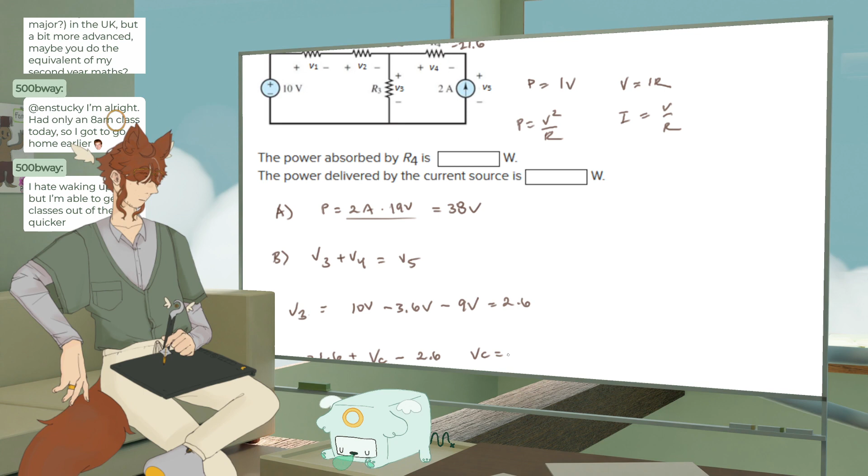Don't worry about it. Current, or we'll say like VC, and then minus, that would be a minus. It's fine. Minus, what do we say? Almost 2.6, so VC equals 21.6 minus.

I mean, for R3, the current's gonna split, so the current won't be 2. That feels kind of weird. I guess I could check the outer loop, so it would be 10.

Let's try that. So if we're going from negative to positive, oh god, let me turn my mouse. If we're going up, okay, let me put it more on center screen for you guys. That was my negative direction. So we'll say negative 10 plus 3.6 plus 2.6. I have another plus 21.6, and then in this case it would be positive negative, right?

So that's definitely not 0. Definitely not 0 is the thing.

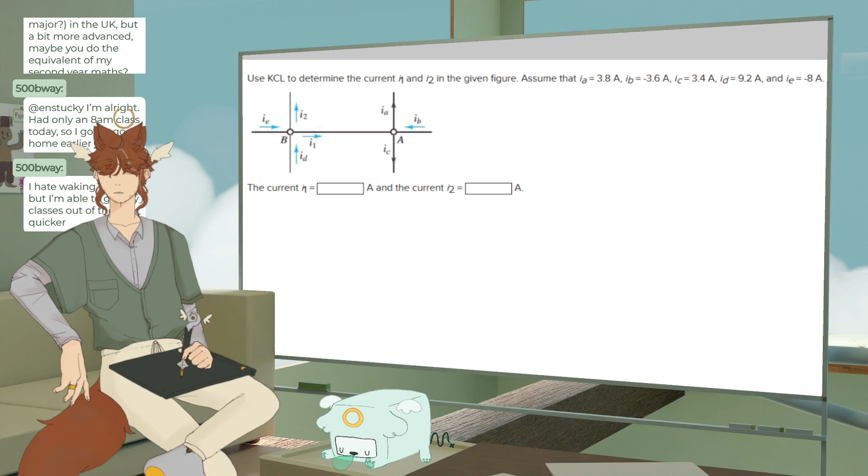Use KCL to determine... okay, sure. Use Kirchhoff. Kirchhoff? I've heard some people say Kirchhoff and some people say Kirchhoff. I don't know which one it is. I should probably look it up. That'd be, I feel like that's pretty important to just know the name of the guy who did everything. Let's see, is it Kerr? Let me get a pronunciation on that. Let's see. Okay, I cannot pronounce it.

I cannot pronounce this. I don't know how to pronounce that one. That one's, I think it's Kirchhoff. I think it's also Kirchhoff, but my current professor keeps calling him Kirchhoff, and I'm like... But then again, people mispronounce phi every single lecture. See, I literally called it phi. It's pronounced phi. This thing. Phi. Rhymes with pi. Oops, that's not it. Okay.

Determine I1 and I2. Alright. Okay, so we just add them all up. So for A, I don't know, let's do A first.

I've never heard it called fee. Because people read it like this, and for some reason they think that equals fee, like fee, fi, fo, fum. But it's like pi, it rhymes with phi. I don't know, people definitely have gotten that one wrong, at least in my classes. Which, you know, maybe not a good sign, but

what can you do? Okay, so IB equals IA plus IC. And then we have another one, plus IB plus, woof, IB plus I1 equals IA plus IC, and then over here, for A, and then for B, we've got, going into it, IE plus ID equals I1 plus I2.

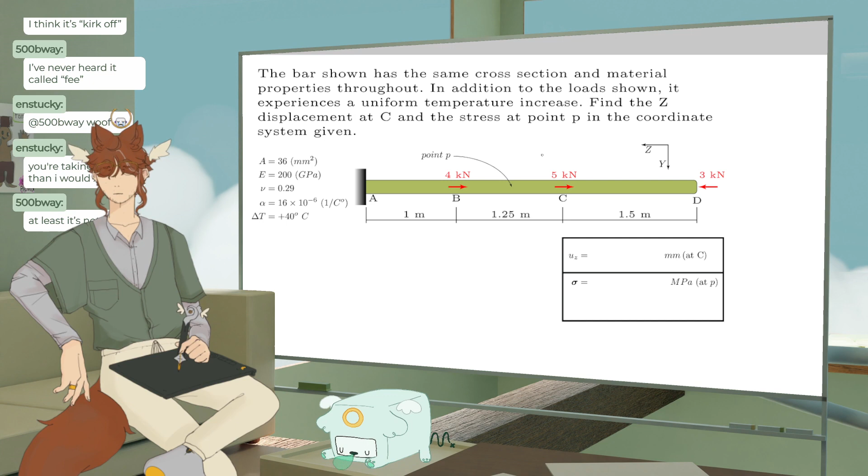And we're trying to figure out how much it deforms, like stretching or compressing. So in this one, the same cross-section and material properties. Our basic equation is we have a delta. The delta is proportional to the load: as the load we put on it goes up, more deformation. As the bar gets longer, it deforms more.

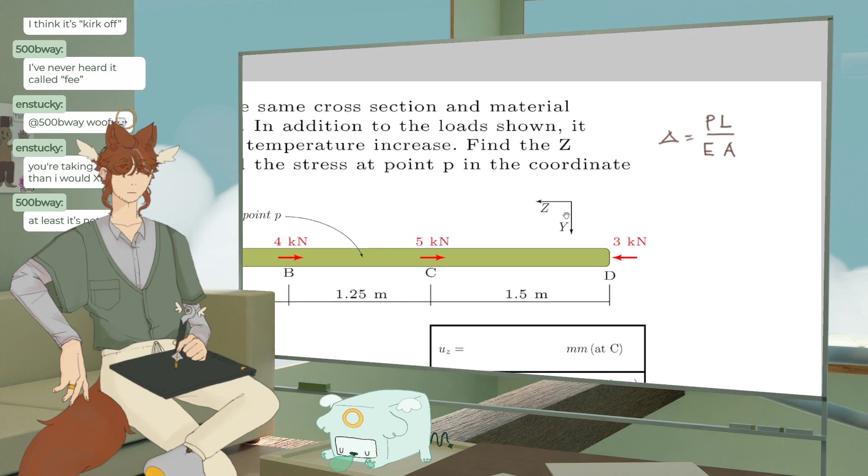As the elasticity of the material goes down, which means it's more elastic, so a rubber band would have a very low elasticity versus steel would have a very high elasticity, our deformation goes up. And as our area decreases, we have more deformation as well. So that's the equation that we use for everything, the constant one. There's an integral version of it as well, if you have a shape that's not a beam.

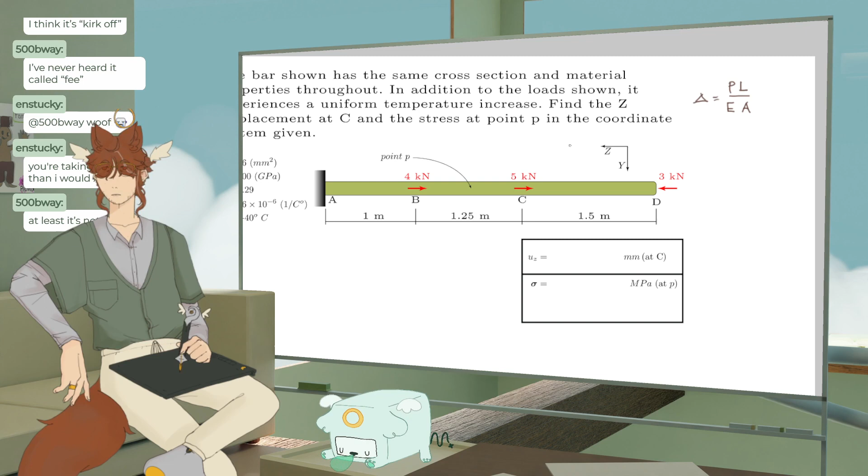So we have loads on it, and we have a uniform temperature increase, which is another equation. There's a deformation with a temperature subscript, and then we have an alpha, which is a material property about how much it deforms, and it's based off of the temperature difference and the length of the material. Which makes sense. If we increase the temperature, it'll expand more or shrink more. And with the length, it's kind of the same thing as a thermal mass.

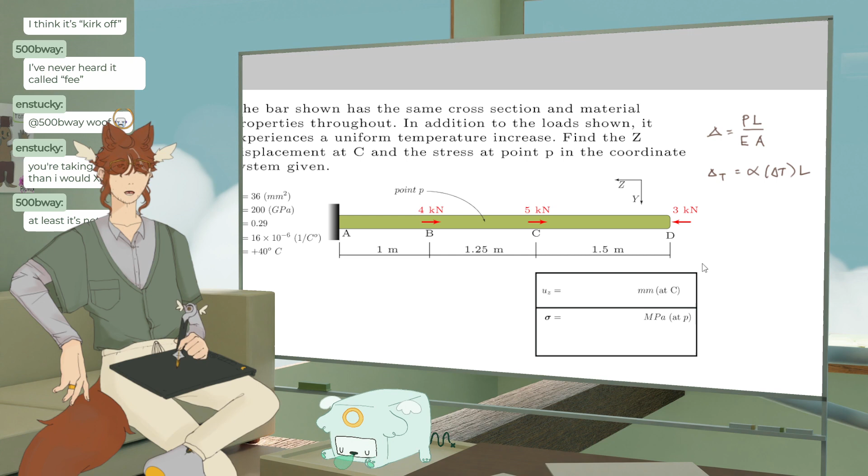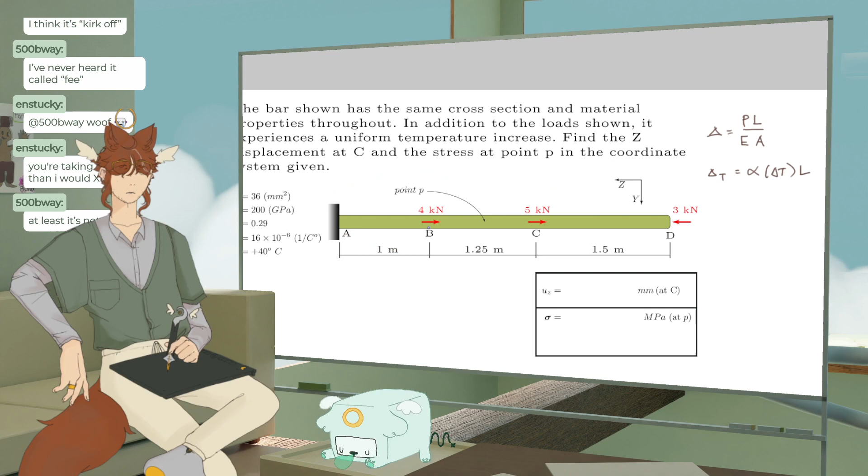So we want to find the z displacement at C and the stress at point P. So we don't have to worry about D too much, because we're going to be doing our analysis on this half of the thing, I think. Is that a lie? We might not have to worry about A. No, we might have to worry about both of them. We're gonna go through it. The only thing I'm thinking about is if there's a reaction force here, then I don't want to deal with that. Yeah, let's just jump into it.

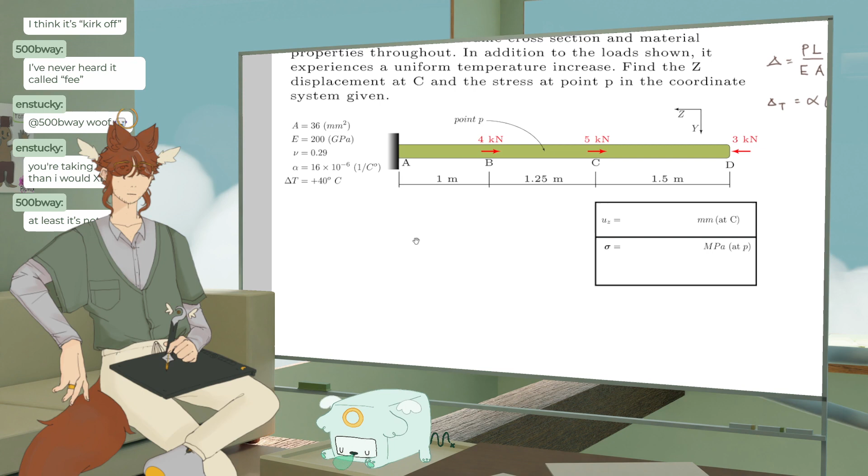Okay, so we tend to do 3 steps, 4 steps. We start with equilibrium. We're trying to find the internal forces. These loads right here are like if you grabbed it with your hand and pulled your hand to the right. So these aren't the internal forces, even though they're shown on the thing. It's an external load. So we have to do some free body diagrams.

Let's do the one for D. So here's D, and we have our 3 kilonewtons. So our force D is going to equal 3 kilonewtons. Pretty simple. And we're trying to find the stress at point P, so we're definitely going to need to do an internal force here. So we just take this much of the thing.

And we say, okay, well there's a 3 kilonewton at the end there, there's a 5 kilonewton here. Let's see, if 5 is going this way and 3 is going this way, we gotta do another force C. Force C equals 2 kilonewtons. And that means that this beam is in tension, whereas this part of this beam is in compression, this member. So we got that.

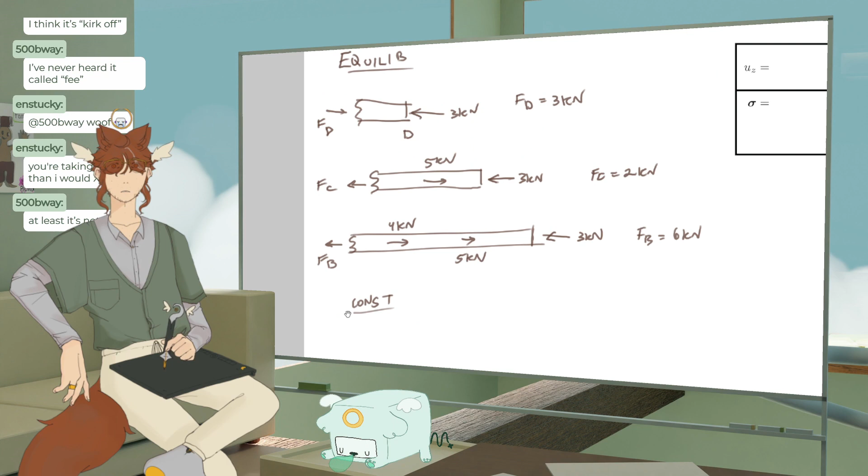This is essentially like our forces, and then this is our deformation, and then we do kinetics to put them together. So our deformation at point B, I guess. Looking ahead to say, I know something about the total deformation, so we're going to start from this side and only do these two, because we actually don't need the deformation over there. So we have our PL over EA, and those values are going to be whatever they are for B. And we're going to add our temperature delta TL for B as well. And then we do the same thing for C. So PL over EA for C plus alpha delta TL for C. Nice. Cool. Awesome.

And then for our kinetics, which is relating the two, we want to relate these two displacements somehow to something that we can find. In this case, it's fine. Sometimes you'll be given a displacement and asked to find like a load or something. So we're going to say displacement at point C, which I guess is not a great subscript. Let's just say C total equals the delta B plus the displacement of the delta C part. So we just add them together, and that'll give us C.

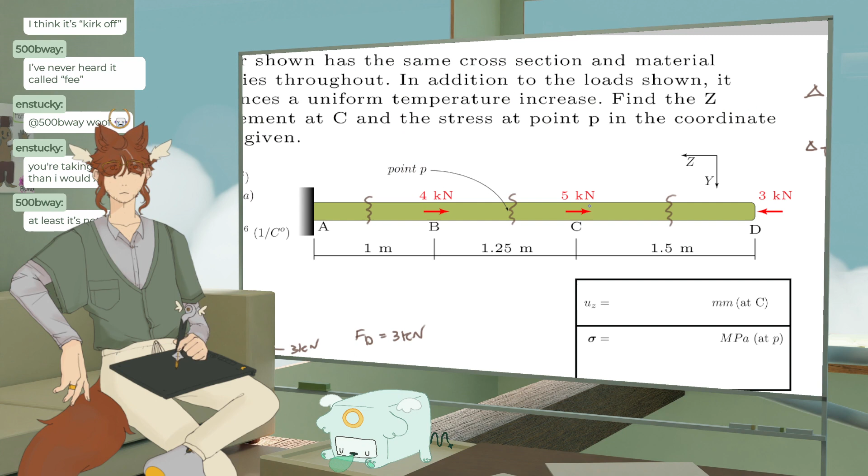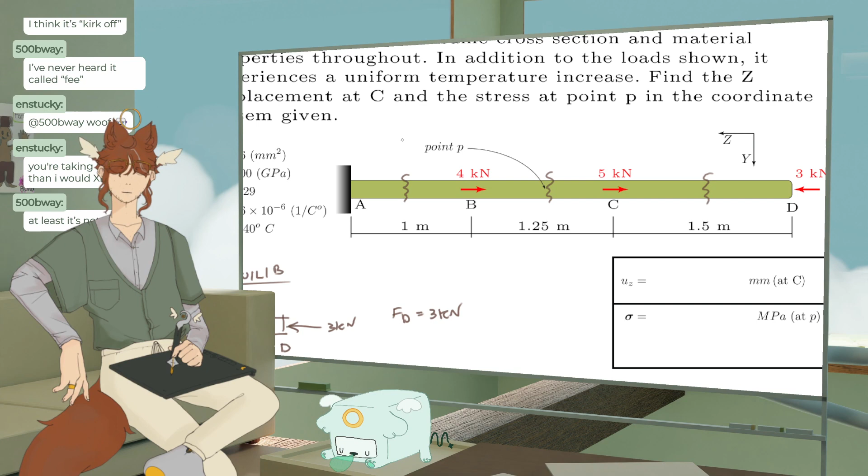That's one of the assumptions we have to make, though, is that the deformations are very small compared to the length of the beam. So the length of the beam is like 3.75 meters compared to a deflection, and it's got a very small diameter as well, or area. So these deflections are going to be very, very small. And our elasticity is 200 gigapascals, which is quite large.

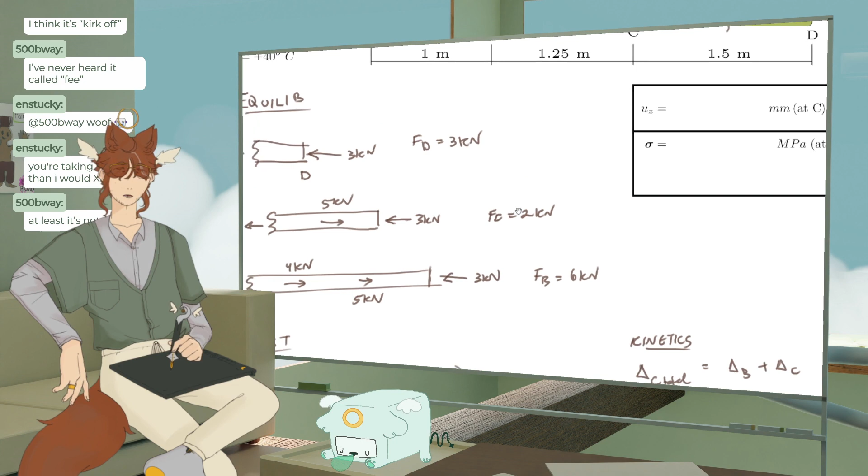So, all right, delta B. Our force at delta B is our 3 kilonewtons. And our length for delta B is 1 meter. So we do this chunk. It's a little unintuitive, but that's the length of it. No, wait, is that the, wait. My brain. No, that's the length of it, I'm pretty sure. It might not be right. Don't listen to me. I'm just a cat boy on the internet.

Giga is 10 to the 9th, right? Okay, if I type in giga, it comes up with giga chat. I don't need to know that. Power of 10. Yeah, 10 to the 9th. Nice.

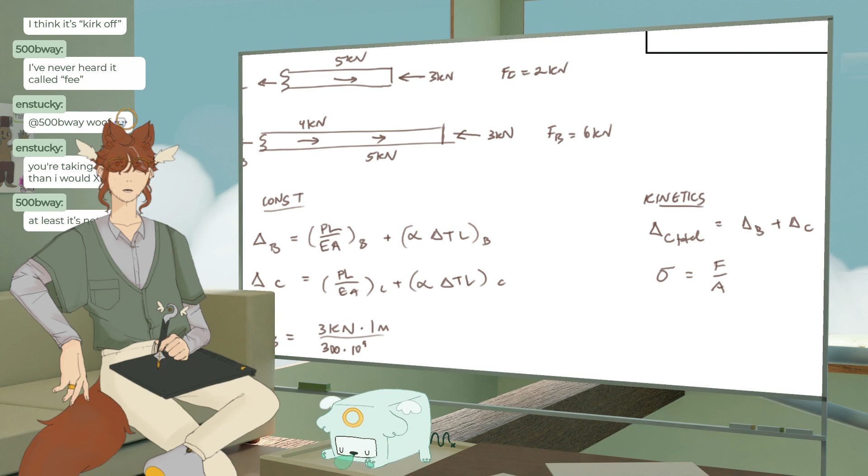And then our area, which is going to be very teeny weeny. So we have millimeters squared, which means that we need to do 1 over 1,000 millimeters, and then that squared. Then plus the 16 times 10 to the negative 6th times the temperature change, which is 40 degrees Celsius. And then the length as well, so 1 meter. That should give us the right thing, question mark.

Let me reply to someone real quick.

Okay, let's see if this is right. I don't know how I'm gonna see if this is right, actually. Oh wait, I think they have worked out solutions, maybe. Well, if we get it wrong, then I might have done my sectioning wrong, which is entirely possible. I'm also converting the kilonewtons to the proper units, just so, you know, no one was worried about that.

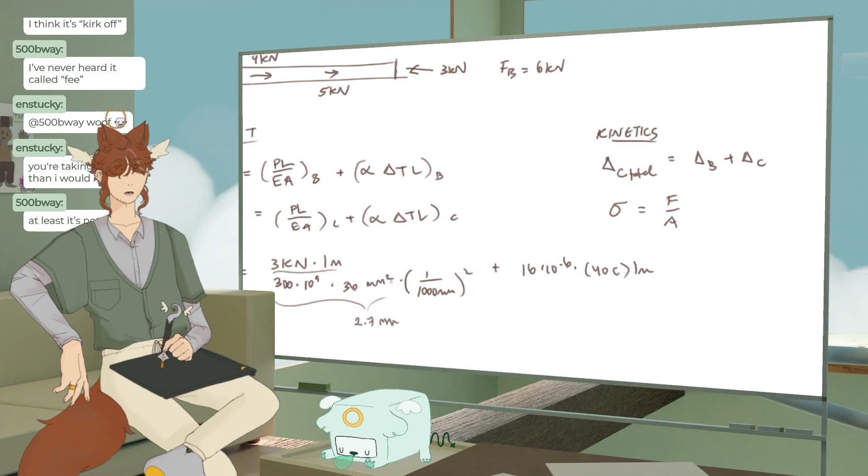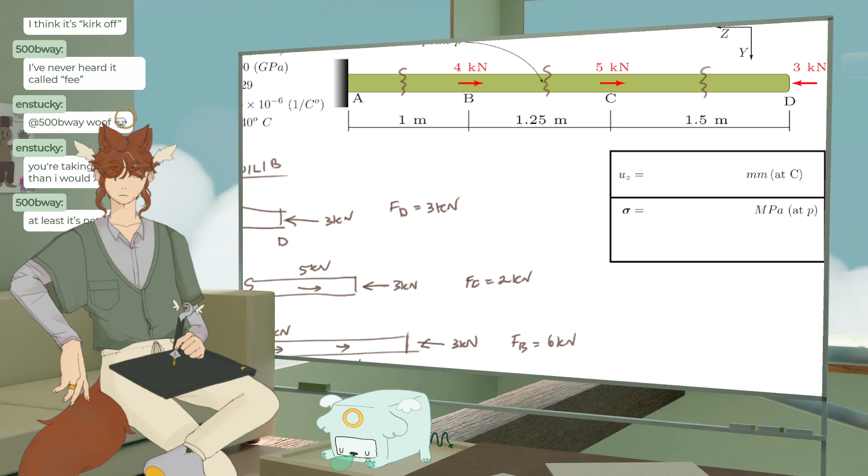And then we have the temperature change, which is 16 times 10 to the negative 6, and then times 40, which is 6.4 millimeters. So overall, this equals 9.28 millimeters change, which is not large for something that's 3 meters long, but it still feels a little weird. I think the magnitude is probably right though. Probably right.

Okay, for the other one, how much longer is C? I would say 1.25 in that case, I think. So I'm just going to take the 2.7 and multiply that by 1.25. And then I'm going to take the other thing and multiply that by 1.25, because the other ones were 1, so that's kind of nice. Times 1.25, and then add that and that. Okay, so this gives us 11.47 for C.

Alright, so we have those, which means that the total deformation is going to be delta C total equals our 9.28 plus this. Let's see. 20.65. And then our stress sigma would be, I think, just 2,000 over 36 millimeters squared. I think. I could be wrong, but that's okay. 55.5.

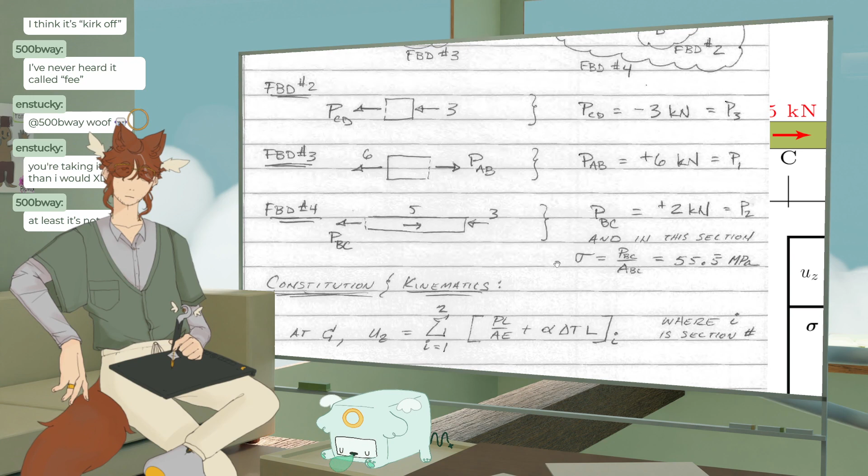He did a free body. He did different free... Wait, let me show you guys. I'm gonna stop leaving you in the dark. Okay, so he did different free bodies. Or he did two the same. I did D. You don't really need D. B is that, where I is section number. Why is he doing all three? Oh no, to 2. This is a really weird way of writing this. He couldn't just say do section 1 and 2, he had to write sigma i equals 1 to 2? At that point you're just making more work for yourself. Okay, but that's right. Kind of right, 2.62, pretty off, but I have no clue how he did this bit, so I can't check my work there. Whoopsies.

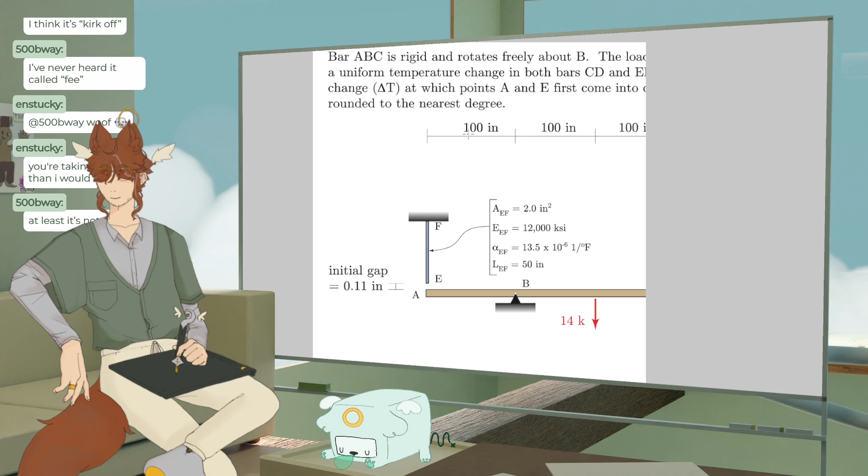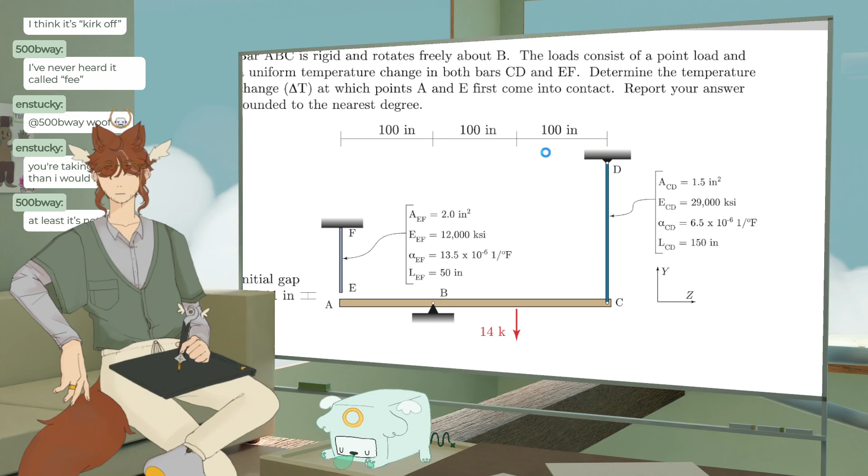Okay, I guess I could do another one. Are there any fun ones? What if I did this one? This one could be fun, and by fun I mean "fun," in quotes. Oh, that's a large picture. Nice of him to upload such a large picture. Okay, so bar ABC is rigid and rotates freely about B. The loads consist of a point load and a uniform temperature change in both bars CD and EF. So we have to figure out how much these guys are shrinking. Determine the temperature change at which points A and E first come into contact. Ooh, okay. That is fascinating.

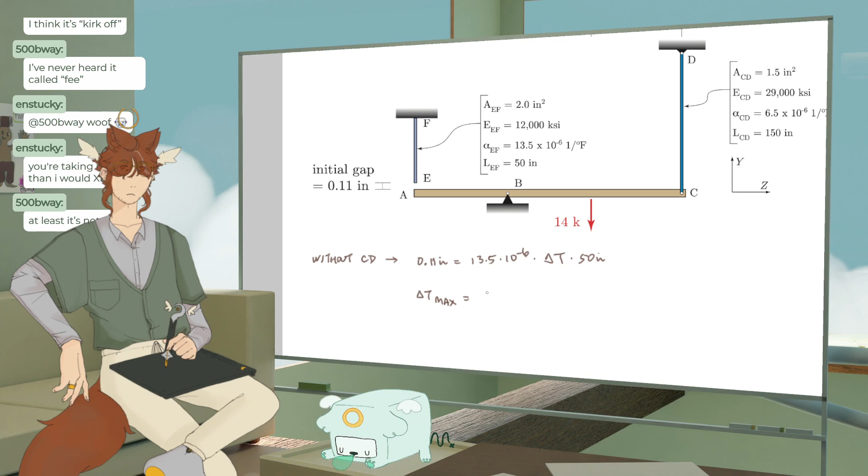So as the temperature changes, we are going to start to close this gap over here, but this is going to expand as well, so it's going to speed up that process. So we can't just say delta T equals this delta TL. It should be smaller than that number. So let's put that as a bound, without CD: 0.11 inches equals 13.5 times 10 to the negative 6 times delta T times the length, which is 50 inches. Delta T max equals, this is the worst case scenario, if there was no bar. So this divided by 13.5 times 10 to the negative 6th.

What? There's no way. There's no way that's right. Wait a second. There's no way that's right. 162.9 degrees Fahrenheit? Hello?

0.11. I'm gonna do all the multiply things first. 0.11 times 10 to the 6th. This divided by 50 divided by 13.5.

So, okay, we start with equilibrium. Oh, we also got a load. Oh, we also have a load. So it should go up a lot faster. Alright, so equilibrium. We're gonna start with our little moment about, I guess I'll draw a free body diagram.

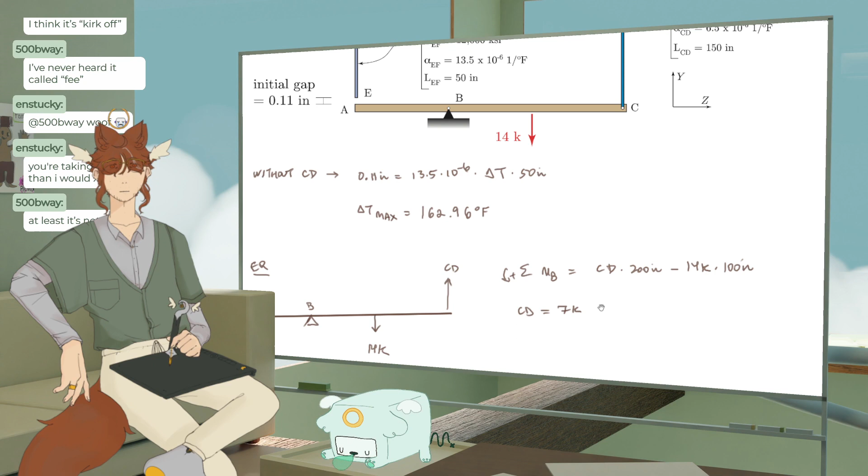Minus 14 kips, so that's what a K is, 1,000 pounds force, 100 inches. So CD equals, well, so the hundreds will cancel out, it'll be 7 kip. And it's in the CD is being pulled on. It's a tension.

So if we draw our free body diagram for CD, we've got CD, and then the internal force, which we can just call like Fi. I don't know, just call it int. So int equals CD equals 7. Yep, cool, so we have our internal forces there.

For this one, we're not gonna worry about that one. Well, we're not gonna worry about that one because it doesn't have any stress on it. Right, I mean, it has some stress here, but that's not what we're trying to analyze, so we'll figure it out. Okay, so we have our that stuff.

Okay, we want to do the deformation type beat. So we want to say delta, the change in this, is going to be PL over EA plus alpha delta T L. So things we know: we know this load, we know the length, we know the elasticity, we know the area, we know alpha.

I was just kind of making up that we knew that. I assumed that we knew these things. Okay, yes, and we know the length. We know the length. So the only unknown we have in this is delta T, which is great.

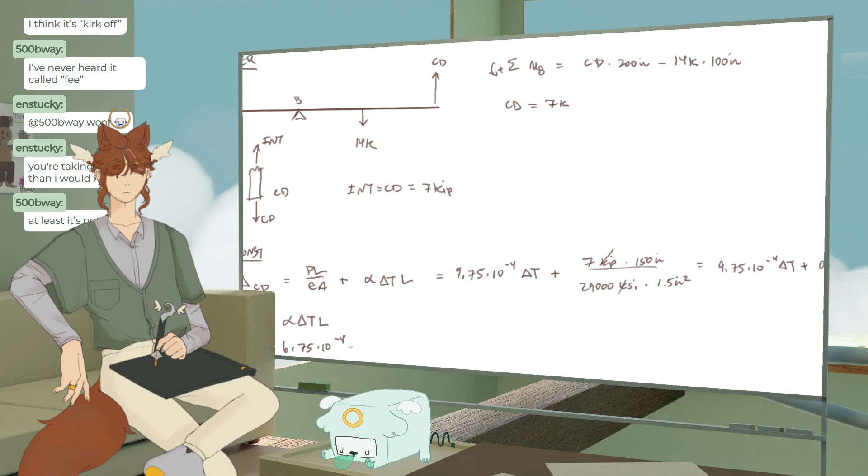13.5 times 10 to the -6, I think so, yeah, times our length, which is 50 inches. So I'm just gonna go ahead and do that out, and I'll put that answer in there. 13.5 times 10 to the -6, times 50... 6.75 to the negative, there we go, delta T. Alright, okay, so we got that.

We need to have our kinematics now, which is the part that I'm a little bit dreading.

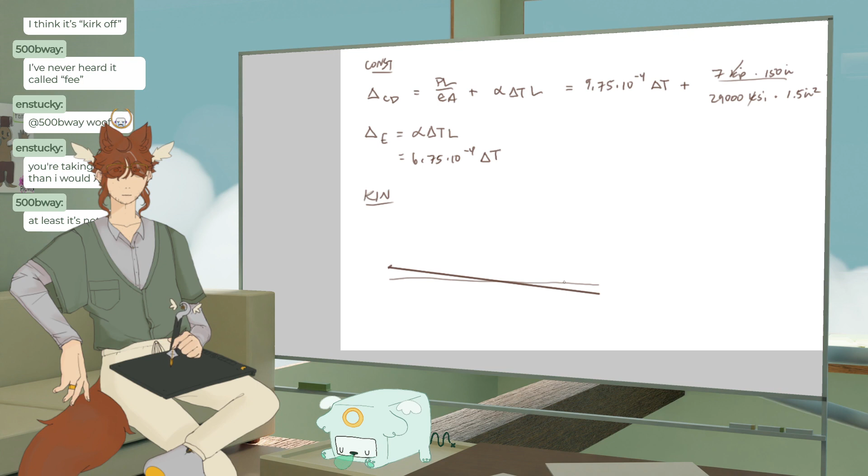So essentially, it's gonna look something like this, where this angle and this angle are the same. So they're similar triangles, because of the right angles. So we know that there is some amount of this going on here, and we're trying to set up, so if we say delta CD is to BC as delta E is to AB.

So then we can just plug these things in. And what have we got? We got, in that case, we would have 6.75 times, what is our BC? Our BC is 200 inches, so pop a 200 on this. 0.135, so 0.135 delta T, that's kind of nice, is equal to, worst number for sure, 9.75 times 10^-4 times 100, and then that 2 point whatever also times 100. Okay, so yeah, we're definitely gonna have to thermally constrict this, because I just got 2.4 for this thing, and that is very large.

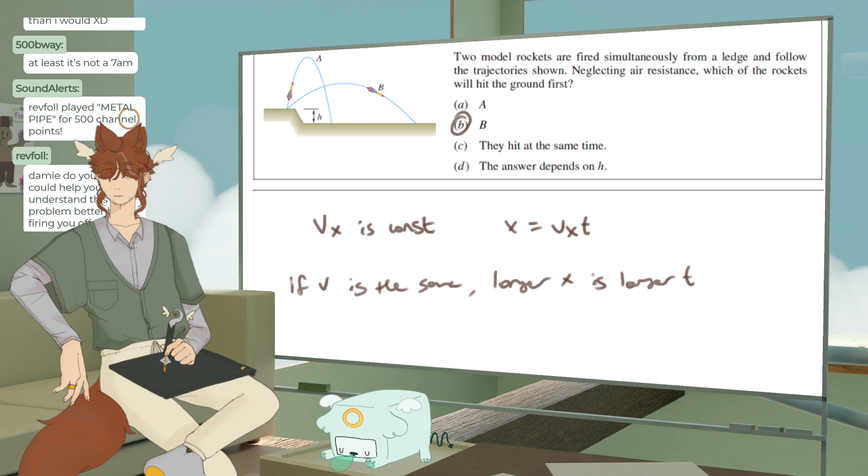Do you think I could help you understand this problem better by firing me off a ledge? If we both got fired off the ledge, then it would help me understand this problem better, because one of us could do this one and the other could do this one. But if it was just me, I couldn't compare it to anything, you know? I need these comparative velocity ones.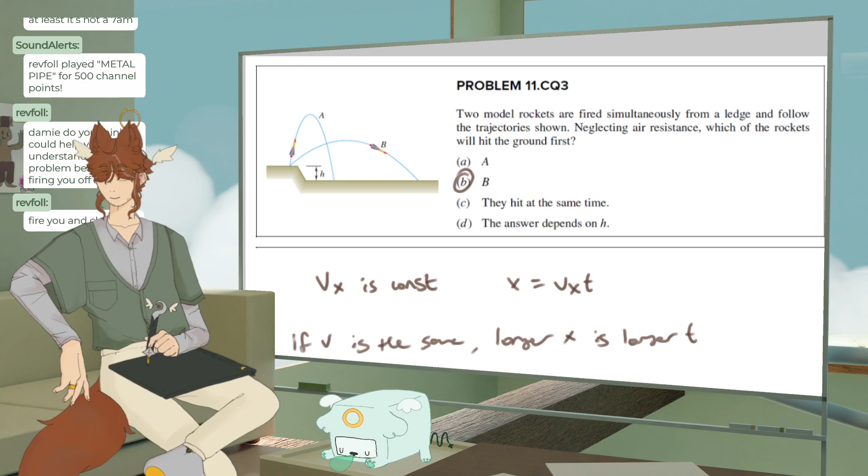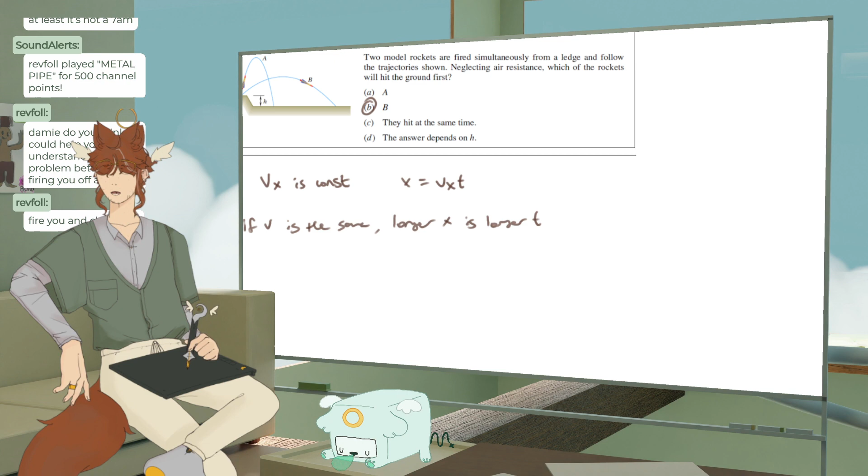I feel like if the velocity is the same and you're going a farther distance, your time has to be longer. Wait, I forgot about acceleration. You know what, I'm not gonna think about that one, let's just pretend it doesn't exist. Everything will get better if you just forget about your problems, you know?

Classic technique. Where did my dynamics go? Where did it go? Oh, here it is. Oh no, where did it go? Okay, there we go. Oh no, we have not escaped that.

This should be the easy part. Why is the derivatives gonna be the easier part for me? This is like high school review. Okay, it's been a while since I've been in high school, I'm not gonna lie.

Negative, I do know that one. If I didn't know that one, I would be a little worried. I think if I posted, you know that post that's like, oh what tweet would you do, like if you were in danger? If I posted, guys, the acceleration at the top of projectile motion is 0, then you should be worried, that's not me, somebody got me. That would be a scary day.

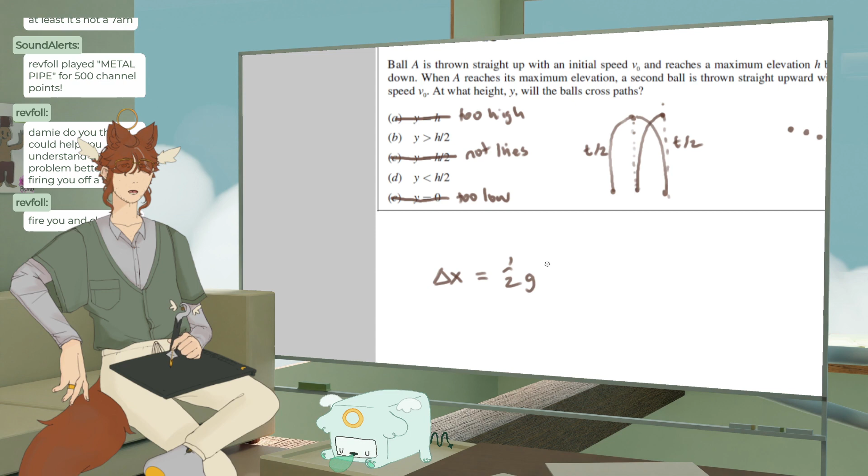What if I just graphed it on a graphing calculator? Sorry, I shouldn't do that. The other one is V0 plus 1/2 gt squared. And we're trying to set these equal to each other. V0 equals 0. Okay, that's not right. V0 t? It's V0 t. I don't know t though. The time that they intersect. I don't really care about the time.

Wait, what? What about V0 is 1/2 delta, wait, let's try this one. Hold on. Okay, then I just switched over to my mix it up. That was not what I wanted to do. Okay, wait a second. So V squared equals V0 squared plus 2g delta x. We want to say they're equal. My tracking is broken. There we go. We want to say they're equal, but this has to be height minus delta x for this one.

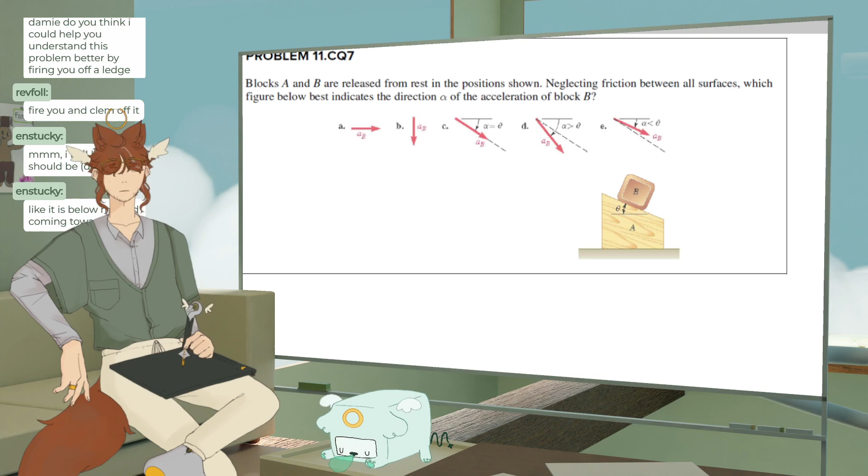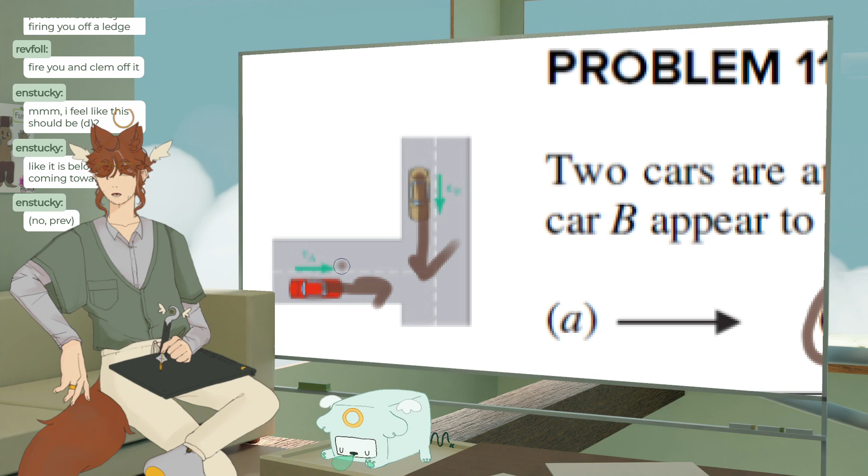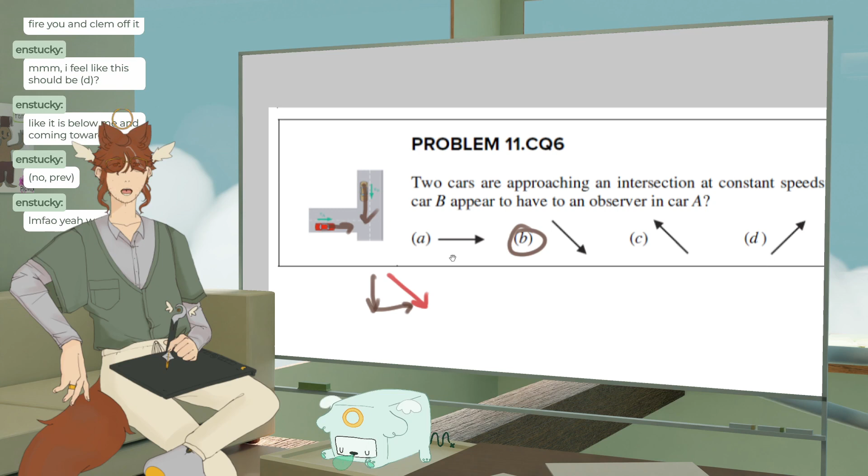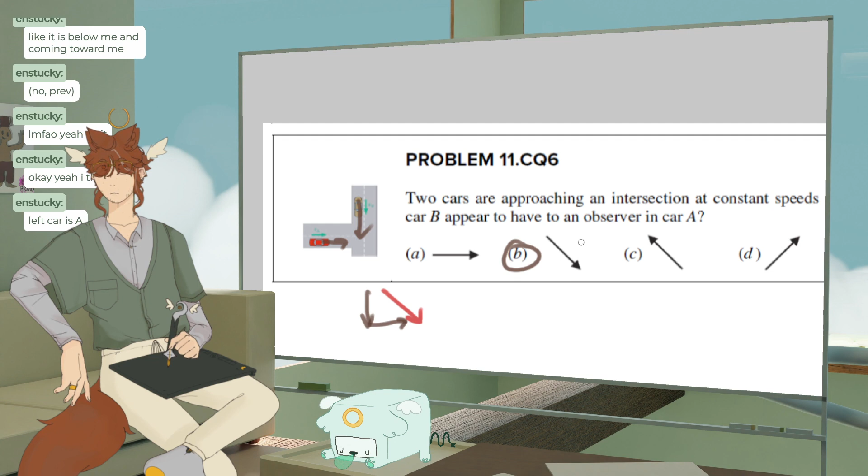I don't actually know. It's below me and coming towards me. If it was that one, then I think it would be... wait. Well, either way I add them. Left car is A. Yes. What speed does B have? Well, wouldn't you just look at it and see it? I think it might just be adding the vectors. I'm not sure if that's correct, though. I could be very wrong.

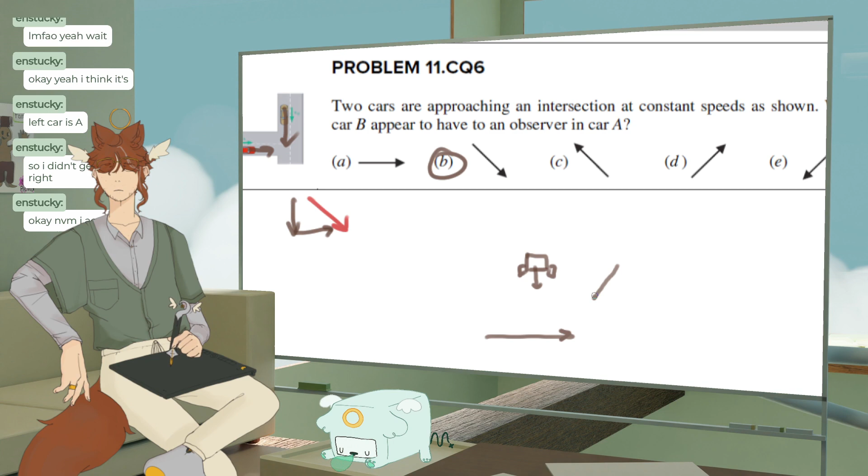But it's like, if you're moving to the right... the only other thing I could think is maybe it's the other way. Maybe it's E instead. Because if you're moving to the right and you're looking here, and it's coming forward, you might think it's going this way? You know what I mean? Like, this is you. Like that Umbrella Academy meme.

I don't know. It's kind of a weird question. Yeah, I can argue for E. I think it might be E, actually. Because the car isn't gonna look like it's driving this way if it's coming forward. But I feel like a human being would know that the car is not driving that way. I think it might be E. Rewrite B. E. It's kind of weird though, huh?

I think I vaguely remember this from talking about reference frames and superposition and stuff. Of like time dilation. Actually, not even that, like quantum physics stuff. But maybe... this is a weird one. Not sure how I feel about that one.

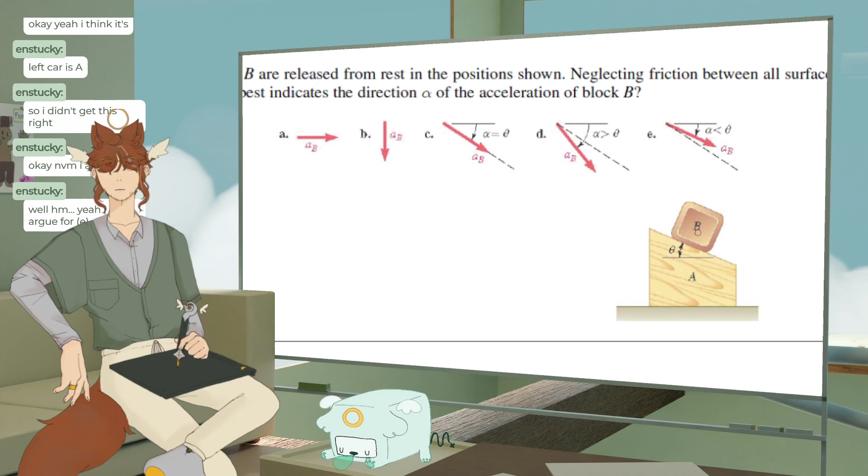This one though, I do know that one of the accelerations is going to be gravity. That's an acceleration. And it's because it has a component in this direction that it's going to move in this direction. So I think it might just be gravity. Funky question? I agree. I think the thing with this question is most people assume, oh, you have an acceleration, the block is speeding up this way, so there has to be an acceleration from this direction, but that's not it, I don't think. But I don't know if you would have...

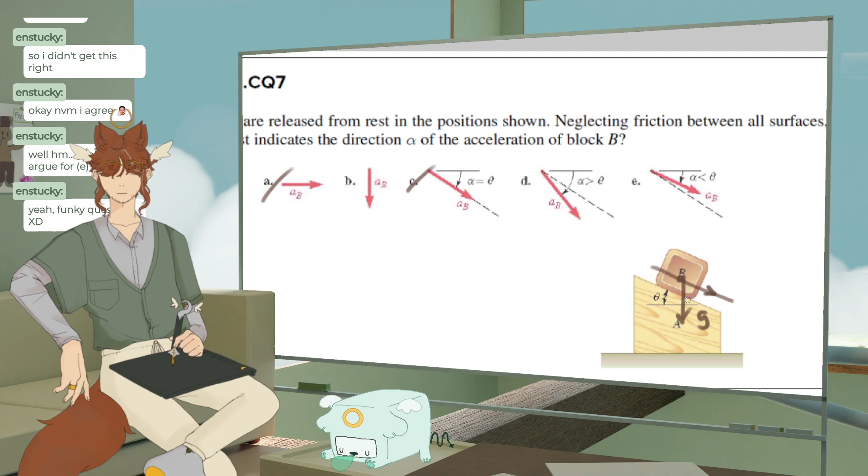It's definitely not just this. And it's definitely not that. I don't really see what you could do to make it that. I mean, that would be like if you had acceleration in this direction and acceleration due to gravity. But they're released from rest, so the only force acting on them is gravity, and we're neglecting friction. So F equals ma.

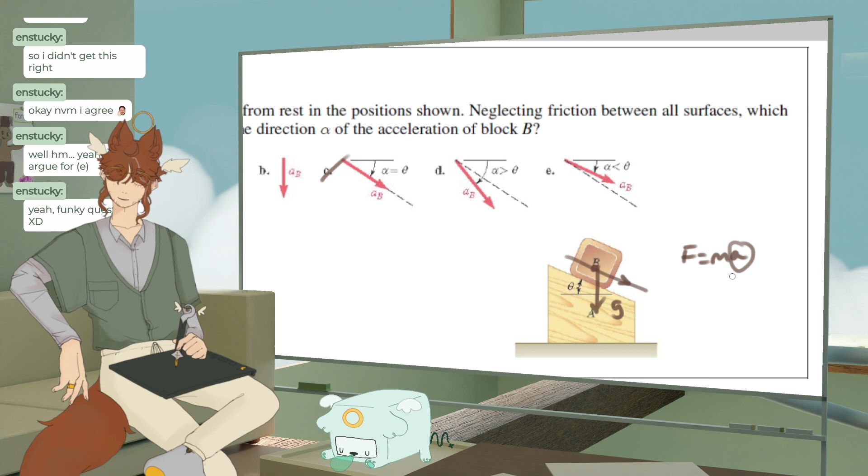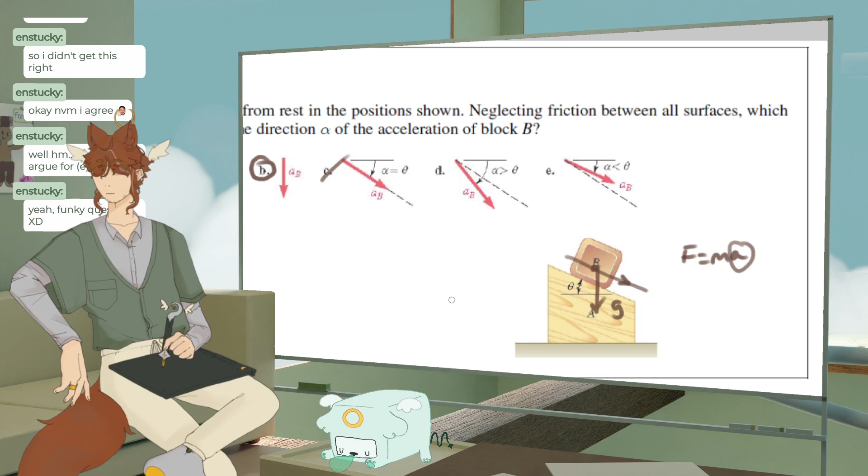But the very off to the side. F equals ma. Our acceleration is based off of our forces, and we only have gravity. So I think it's only down, I think. Not too sure. I think it's that. That makes sense to me. But then again, sometimes these things don't make that much sense, and you think you know what you're doing, and then you don't. But that's okay. That's why we practice.

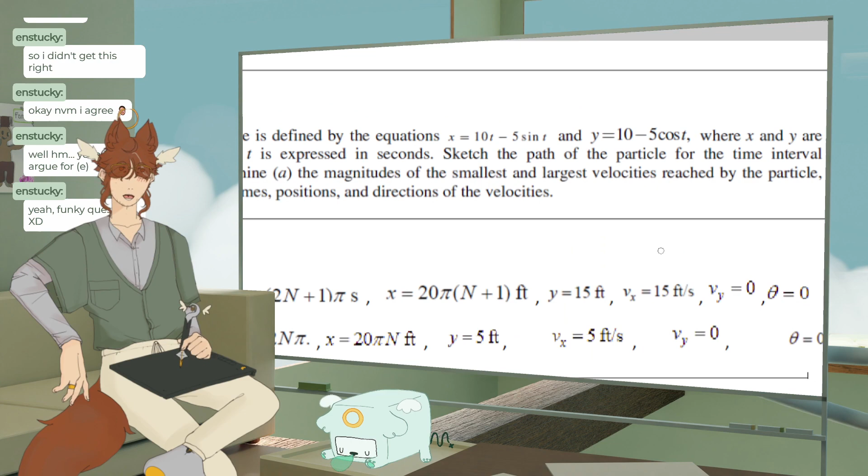Okay, let's see. Finally a math question. Thank God. Saving my ass. Doing the math. Not the high school physics I haven't looked at. Alright. Yes. Yippee.

Okay. We got motion of a particle in parametric. But you can also express this in vector form. I mean, it is vector form, but you can, yeah. Sketch the path of the particle in a time interval, 0 to 2 pi. Okay. We can do that. Alright, let's do a long boy.

2 pi. Pi in here. We got pi over 2. Pi over 2. Probably pi over 4. Kind of inefficient way of doing this, but it's okay. 7 pi over 4. Alright. We got some pi's up in here. Alright, so x is going to be that, and y is going to be that. So I'm going to sketch the graphs of those first. So y is going to be a little easier. So this is y and this is t.

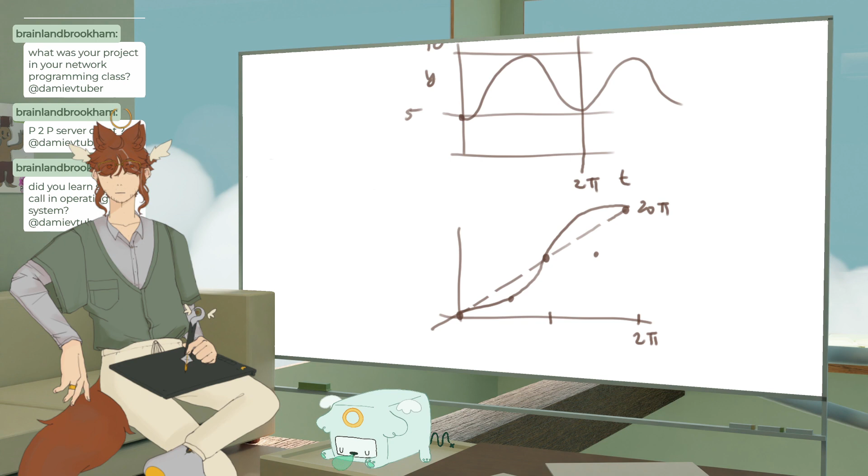I'm gonna go to Desmos. I feel like that's a little funky. Minus, what was it, sine x? Oops, okay. Nope, it just looks like a line. That's weird. Oh wait, minus 5 sine x. It does kind of look like a wibbly wobbly line. It's not very wibbly wobbly, but it's a little wibbly wobbly. What if we did 10 sine x? Then it would be very wibbly wobbly. What about 8 sine x? Wow, that's so cool. What about 100 sine x? Okay, that looks weird. What about 20 sine x? That is so fascinating.

The more you know. Okay, so it doesn't look exactly like that, but just pretend it kind of looks like that. It's a little bit more like this. Or up, and then, yeah. Okay, none of these are entirely helpful to me. But when t equals 0, what do we have? This is gonna be somewhere between 5 and... What is 20 times pi? 60-ish? Wait, 20 times pi is gonna be more than that, isn't it? Maybe 65? No, 60 is close enough. Okay, maybe we do 10, 20, 30, 40, 50.

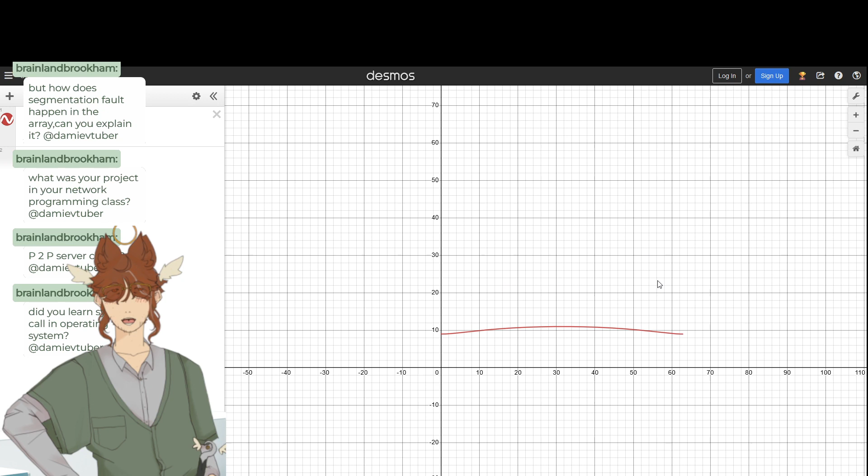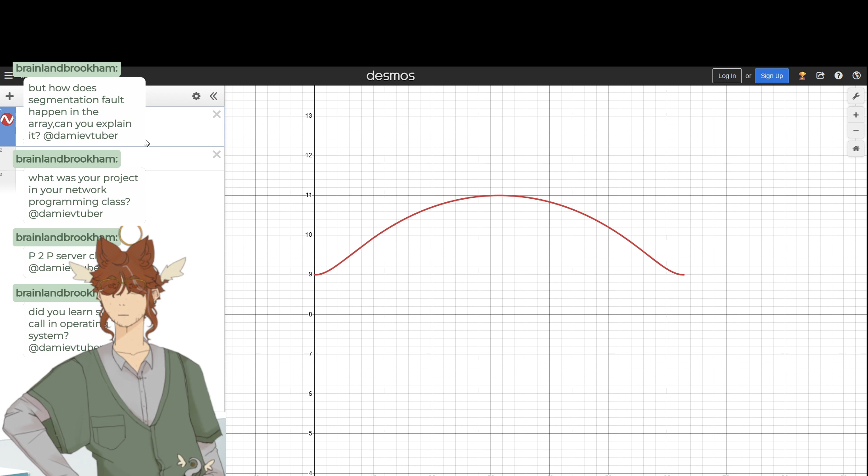Okay, that's kind of what we had. If you change the step to... What did we have it at? 5 to 15. And then on the x-axis was like, yeah, something like that. Oh, it starts at 9? How does it start at 9? What? Am I goofy? 10 minus 5. Oh, whoops. There we go. Yeah, that looks like not exactly what we had, but close. I think it's just because I did a break at the beginning. Yeah, that's pretty close. I'm happy with that. By happy I mean it's passable. I could probably do better, for sure.

Okay, oh my god, it's been like 2 hours? No way, that's insane. Let's finish this one, and then I think I'm gonna call it, because I'm a little goofy. I'm a little all over the place. And I should probably go rest my eyes and not look at a screen.

Okay, determine the magnitude of the smallest and largest velocities reached by the particle. So we gotta maximize and minimize. And the corresponding times, positions, and directions. We gotta do some derivatives. It looks like we wanna do dx dt, so this is v, technically. So dx dt is going to equal 10 minus 5 cosine t. And then dy dt is going to equal 5 sine t.